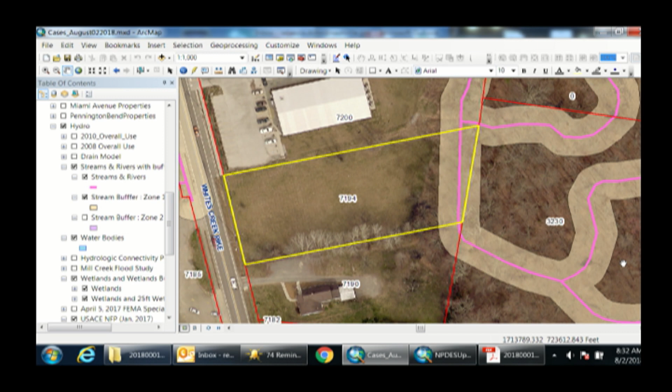Appellant is S. Pateri, O'Reilly Automotive Stores Incorporated, Representative Bobby Dietz, BFW Engineering and Testing Incorporated. And comments, stormwater staff is questionable whether the proposed mitigation compensates for the resource loss.

The codes, no comment provided. Planning, site is zoned CL, defer to stormwater for review. Greenways defers to the comments of the Stormwater Management Committee.

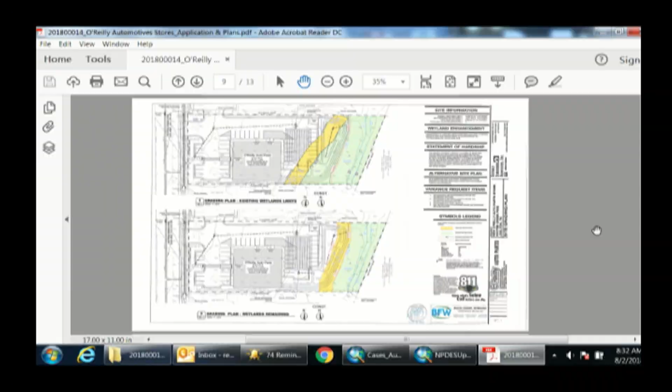Thank you very much. And with that, we'll turn the floor over to the applicant. Okay, I'm Bobby Dietz with BFW Engineering, and I have at my side Susanna Campbell with 5H Technologies. They performed the wetland delineation and the enhancement plan.

Started out the project, I had requested a pre-application meeting with Steve. Met with him to discuss stormwater. He looked at some mapping. He mentioned there were some notes that there could be wetlands on the property, so we hired 5H to do a delineation, and they delineated the limits of the buffer and the wetland, and then the impacts of our project on those. Then 5H Technologies developed a wetland enhancement plan to help mitigate the loss of wetlands.

And what I'd like to do is turn that part over to Susanna and let her talk about what we're going to do for mitigation.

We prepared this plan because basically the existing wetlands on the site, there were some wooded wetlands at the back of the property, and then there were some emergent herbaceous vegetation outside of the wooded area. Basically, there's a lot of invasive species that exist within the wooded area, even though it is a wooded wetland area next to the stream.

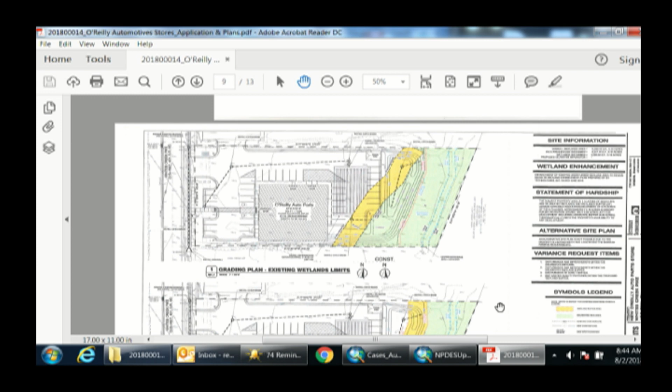Well, because that buffer also impacts the drive aisle, it would eliminate, looks to me like 10 parking spaces. Right now we have just enough parking spaces without having to ask for any variances. Based on O'Reilly's requirements, or Metro's? City requirements, city ordinance, city zoning. Takes 37 parking spaces, and we have 37. I'm not suggesting eliminating parking, I'm suggesting extending the buffer around the parking spaces on the south side of the property.

You've cut a big chunk of it off, there's additional space there. Possibly, that would be an area we're anticipating mowing. Part of that takes in that forebay area for the bioretention basin. I think I would look for a recommendation from this board or from Metro Water if they wanted us to extend that buffer area into something that's not being impacted by improvements, permit improvement.

I don't know, others, if we could recapture some of that buffer area? It would still, we'd end up disturbing it because we're going to have to put fill in there. It would just be however we left it when we got done. Just looking at that, it would be a section where we could plant some trees or some kind of plantings and possibly not mow it, if they preferred.

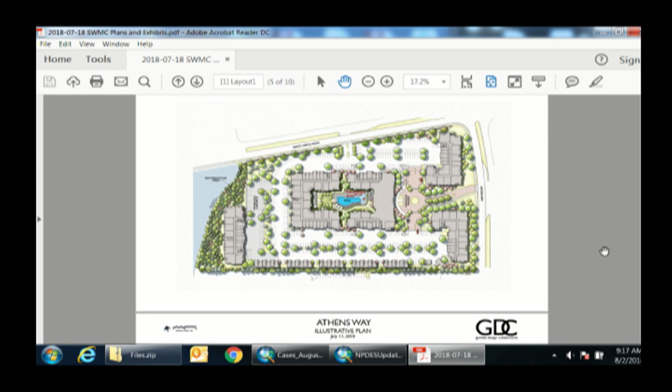So first, I'd like to get into a little bit more detail on the pond buffer impacts. There's an image in the narrative that we provided that shows the existing conditions of the lake bank. What you might see there is a 6 to 9 foot drop off, all exposed earth that goes straight into the edge of water. It's a condition that's prone to erosion and subsidence, and we also believe it represents an unsafe condition with the drop off for either a residential or any sort of development on this site.

There's been a similar condition around Amulet Lake, and those have been mitigated in the past by installation of a simple riprap revetment with mowed grass on top. But in meeting with Stormwater staff, we decided to go a different route, and that is we're proposing a biostabilized lake bank, which includes a gradual 3 to 1 or less slope up from the edge of water. It includes natural coconut fiber erosion control matting to stabilize that slope, and also the installation of live stakes or native live plantings to further stabilize that slope.

It's important to note that we don't have any impervious area or buildings proposed within either the Zone 1 or Zone 2 buffer. In fact, the closest location we have is the planned north corner of that building close to the lake, and that is 35 feet away from the edge of water, well above the 25-foot Zone 1 and Zone 2 buffer. You'll notice that the majority of it is much further than that, the impervious area and building, more like 50 or 100 feet away from the edge of water.

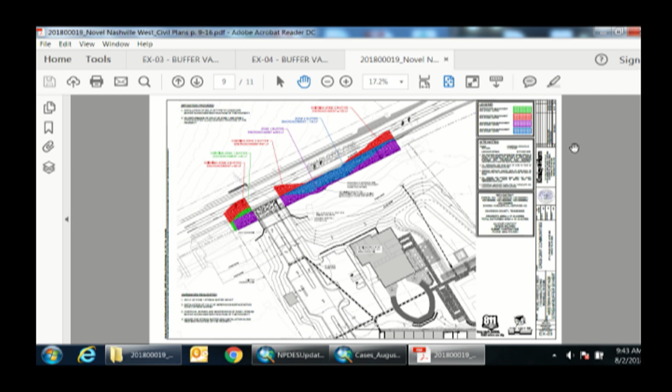The sidewalk will be improved similar to the property adjacent to us to the west. They were required to put in a sidewalk and grass strip in accordance with the MCSP, and we will be matching their sidewalk and grass strip similarly, and they also put in their turn lane. So it's really continuing that left-hand turn lane that was installed with the Beezer townhome project immediately to our west. We'll have a similar grass strip and similar sidewalk width so that in the future, per the MCSP, if the roadway gets widened further, the sidewalk won't have to be moved again.

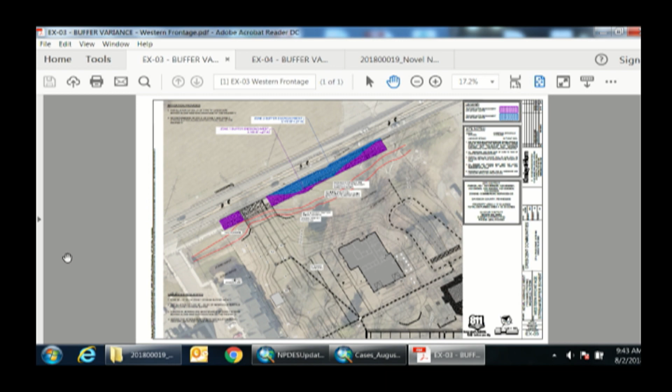Again, the stream is where it is, the road is where it is today. None of the development that we're proposing as it relates to drives, parking, roads, stormwater, BMPs, any of those things impact the Zone 1 and Zone 2 buffer that's there on the stream, on the southern and eastern side of the stream where our development is actually proposed.

So these improvements are required as part of Public Works recommendations for approval, the traffic impact study, and the MCSP. So we are proposing a three-sided box culvert. As you can see, the culvert there where our driveway is, and those disturbances would be allowed under the current stormwater management manual for a three-sided box culvert in a perpendicular driveway crossing. We only have one driveway crossing.

We did do a jurisdictional determination for the property, and that was classified as an intermittent stream, so we did use the three-sided box culvert. We have applied for ARAP from TDEC just for the crossing. Even though it's a three-sided culvert, TDEC still likes to have ARAP approval, so we submitted that and actually received it this week.

The mitigation proposed is the installation of new landscaping along the western frontage, a mixture of hardwoods, understories, and some shrubs. On the eastern frontage, we will be preserving existing hardwood vegetation in the Zone 1 and Zone 2 buffer and installing the stream buffer signage.

Through conversations with staff, I think that we would be open to not maintaining the Zone 1 buffer on the western frontage, just letting that go natural. Our goal is to plant these trees, and we want to be able to maintain them and get in there and remove invasive species. So we don't have to mow right to the edge of the buffer; we could let that go a little bit more natural.

There are some existing trees out there within that buffer. Whatever's in that buffer today that is healthy and living will remain. The western frontage has a few trees sprinkled in; you can see on your screens in the area some shadows of some trees. So all those would remain as existing, and we'll be supplementing those with additional landscaping to provide a better riparian buffer for the stream.

And I'll be glad to answer any questions you may have regarding the project or the proposed impacts and/or mitigation.

Thank you. Is there anyone here to speak in favor of or in opposition to the applicant's request? Seeing none, let's turn it over to the committee for questions of the applicant or discussion.